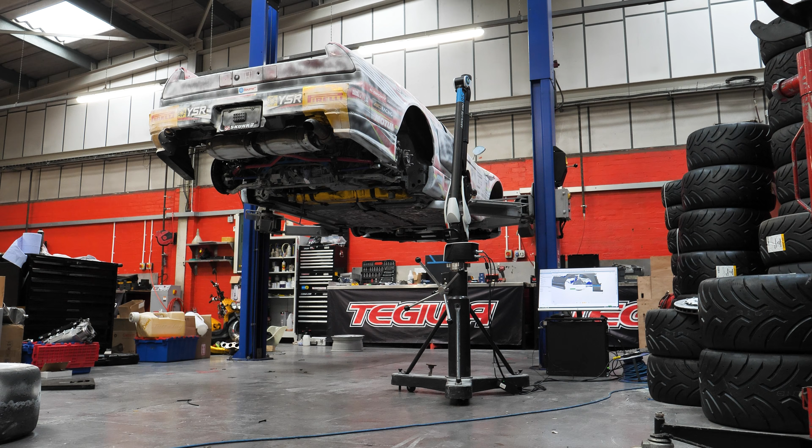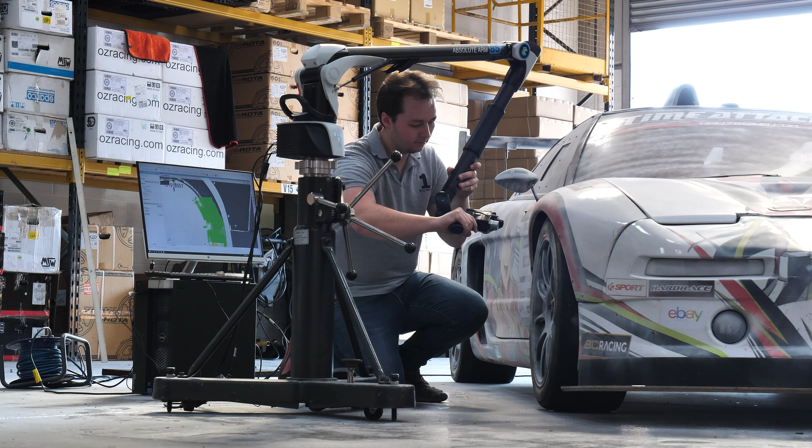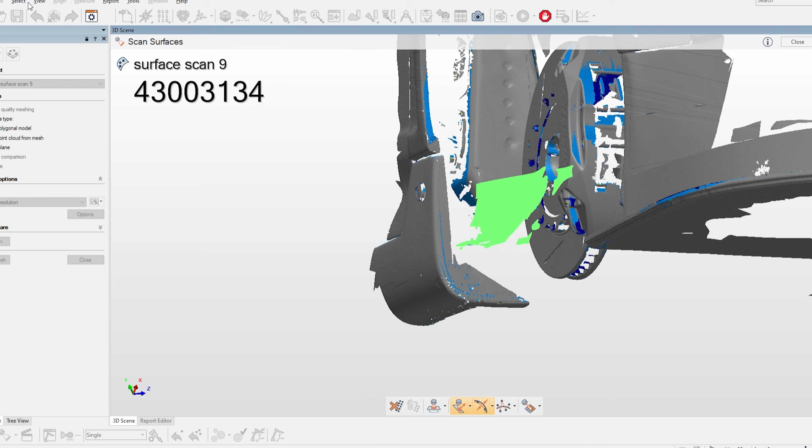Luke and the guys at Tegiwa have expressed some interest in doing some CFD on the car, developing the aero pack from where it is at the moment. So the first stage in that process is to get a base of where we're at. We scan the entire car, top, underside, everything in the arches. Andy's just disassembling the brakes so we can get some more clearance at the moment. After scanning the entire car, we go into surfacing to basically turn it into a CAD model that allows us to put it into the CFD software that Andrew uses. From that, he'll develop a package with Luke and the guys here to suit their downforce levels that they require and their budget.

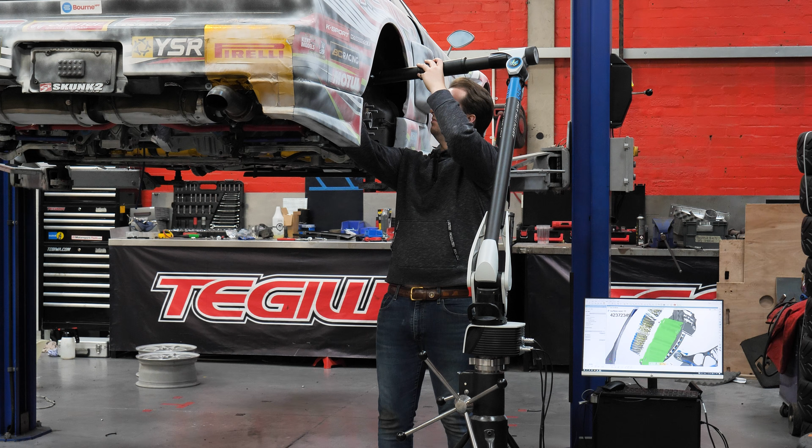From that point onwards, we come back and have a discussion about making it manufacturable, turning it into physical parts. We go into part design specifically, fitting it to the car, using all the mounting points or designing new mounting points for it, and then turn those into tooling designs. We then get the tooling made, machined, carbon molds made, and then carbon body parts made, and hopefully it fits on the car first time. And then it's down to testing.

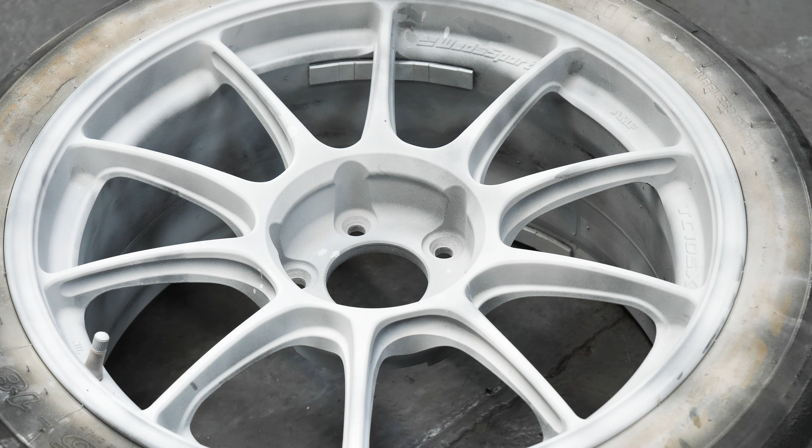So a lot of people have been asking about the white powder. It's a developer spray used in crack testing, but it's super fine and neutralizes the surface of the car. The scanner can detect color, but the exposure of the different colors makes it hard for the scanner to pick up. So we spray it over and it just neutralizes, dulls everything down, and makes it easier to pick up the data.

So this is day 2 essentially. We were in yesterday scanning the top side of the car. Now we're going on to the underside, arches, splitter, looking at clearances and getting some data for the current values.

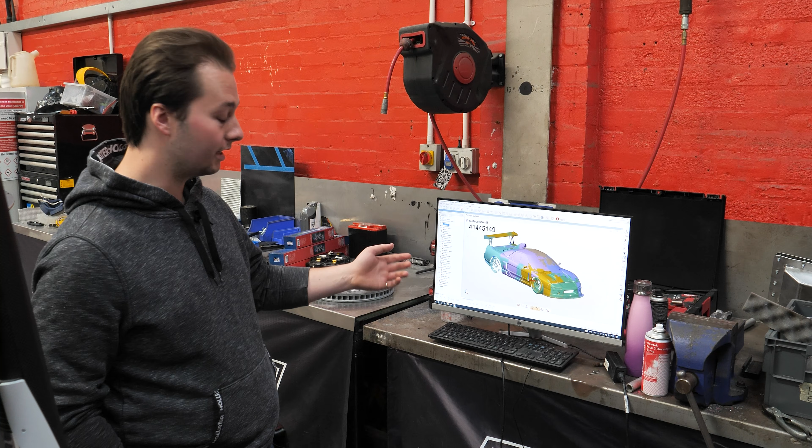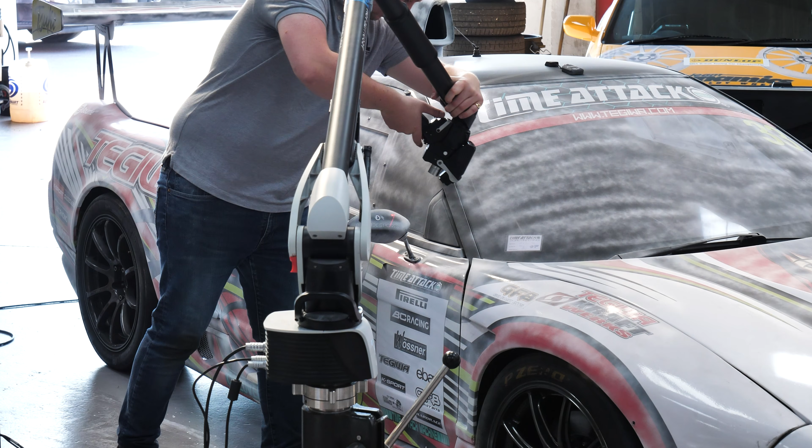We start, there's a couple of different types of scanners - there's arms and then there's handheld scanners. I use the arm. Handheld scanners are just as good, but they use reference points on the surfaces, little dots. This has to move and then we realign, so I make sure I scan over the same part twice and use that to realign the scans back in. You can see from the different colors - this is the top skin of the car at the moment. All the different colors represent a different scan, and then we mesh them all together and turn it into one big surface.

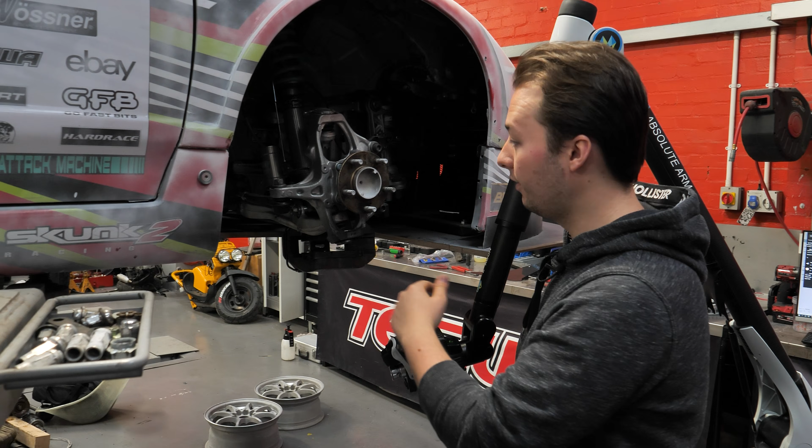So now we're going to do this for the underside of the car. We've taken the wheel off, I've scanned some of the bodywork so we can auto align back in. We've scanned the wheel already, I've scanned the rotor and the caliper, and now Andy's taking it off so we can get a bit more clearance in there. I'm going to scan the entire arch, just so we can see when air is flowing through the arch that it's not being disturbed too much.

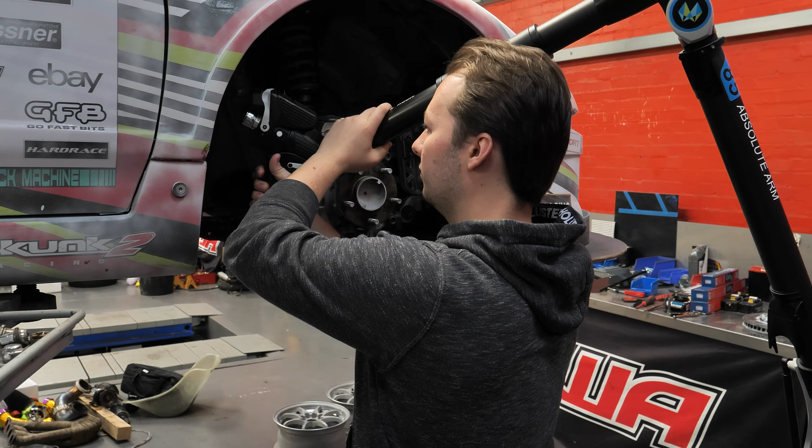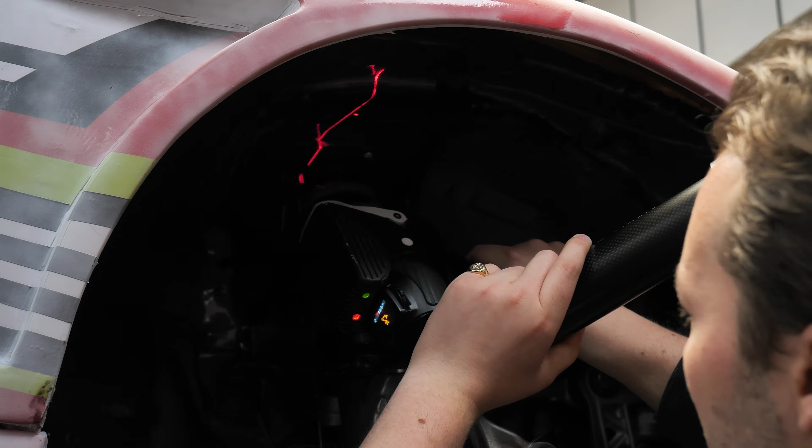The idea is to be as detailed as possible, to try and make surfacing later on as easy as possible. Obviously it's quite a large car, so access is limited in some instances.

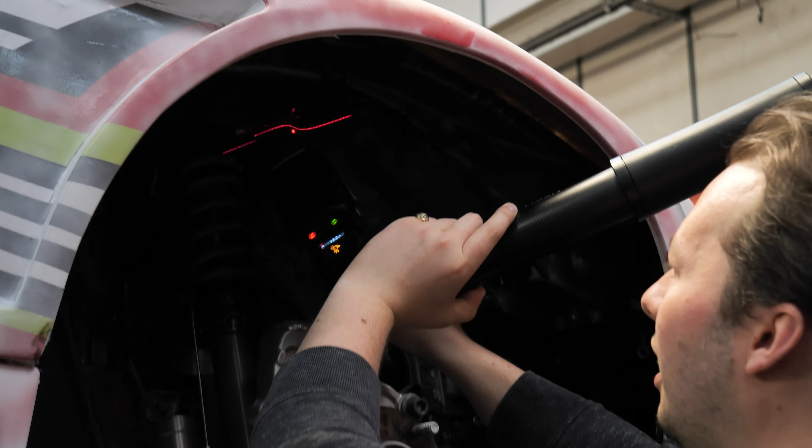I'll just quickly show you what we've done. Just before we started, I scanned part of the bodywork, so I'm going to use this to align back into the actual car. As I said, we scanned the rotor and the caliper, and then we've come in and just scanned the underside of that wheel arch. We'll go back now and finish it off.